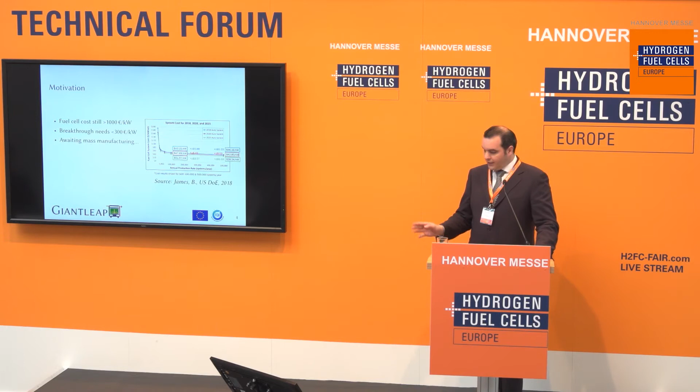That's the outline: a bit of introduction and motivation, then we'll go through the various results in the project. Here the motivation is mainly that we still have a very high cost for fuel cells today. It's in the range of 1,000 to 2,000 euros per kilowatt if you buy them today. But we expect a breakthrough if we go into the hundreds, for example, less than 300.

That's a graph from the Department of Energy in the US, and the most important takeaway is that the price will be reduced mostly by mass manufacturing rather than technological improvements in the next few years. So what we're waiting for is mass manufacturing.

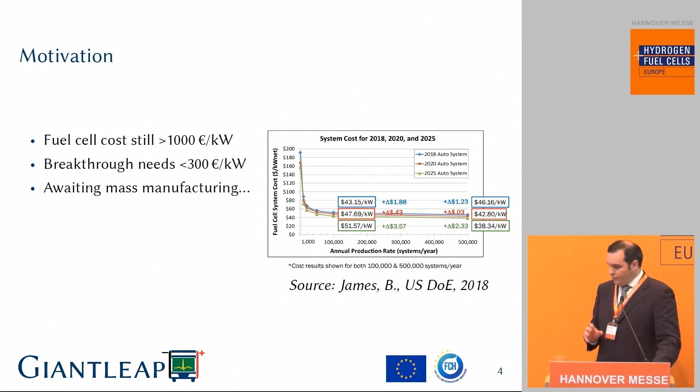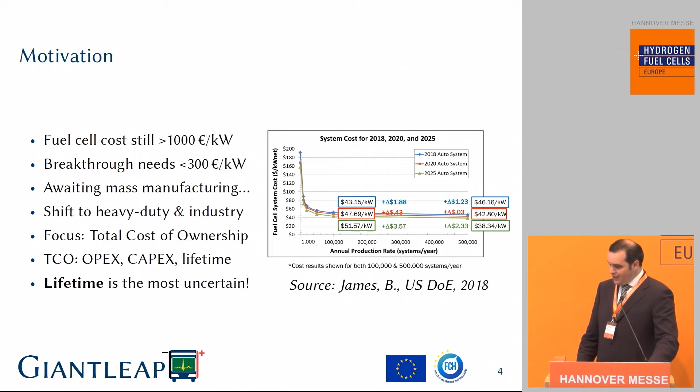And there is also, you might have noticed around here, a shift in interest from personal cars to heavy duty: buses, trucks, ships, you name it. The operators of these kinds of vehicles are more interested in TCO, in OPEX, CAPEX, and lifetime, rather than the car being cool, like a Tesla buyer could be. Of these, lifetime is definitely the most uncertain.

In the CHIC project, you might have heard of it, a very big EU project with over 80 million euros in budget, they measured a very low availability, around 70%. Now there is a cluster of other projects on buses in Aberdeen. They measured more than 85%, but it's still a far cry from the 98% that you need in buses, which is what you get from diesel.

You need reliability, and most of the time these buses did not have problems with the fuel cell stack itself. It was mostly the balance of plant and other problems, for example, supply chain. That's why we started this project Giantleap, to solve all these problems, to increase availability and to make hydrogen buses more acceptable to bus operators.

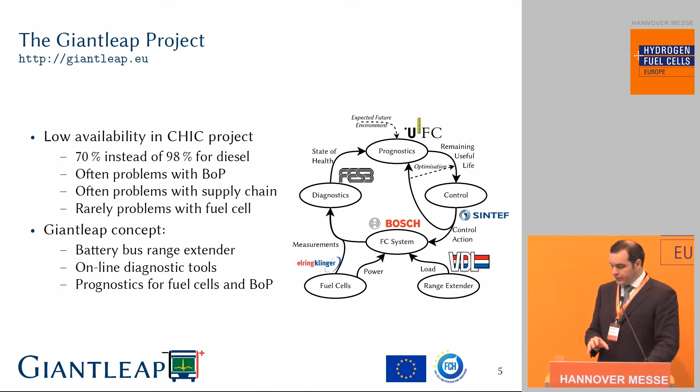So our concept is a battery bus with a hydrogen range extender. We'll employ online diagnostic tools and apply prognostics to determine how long the system is going to live.

Your buses are all battery buses, and when you need a long range or don't have the time for a charge, you just connect a hydrogen range extender like this one, and off you go. Then you can make a city bus into a regional bus. You can also use it to charge cars in theory, because it follows a very standard CCS protocol.

It has 2 stack modules for a total of 76 kilowatts nominal, and the balance of plant system was developed by Bosch. There were a number of bureaucratic implications about whether this is a battery or a hydrogen bus. I won't go into that, but it was quite interesting.

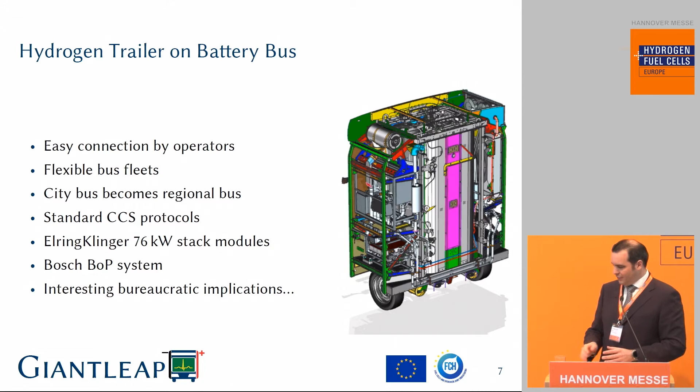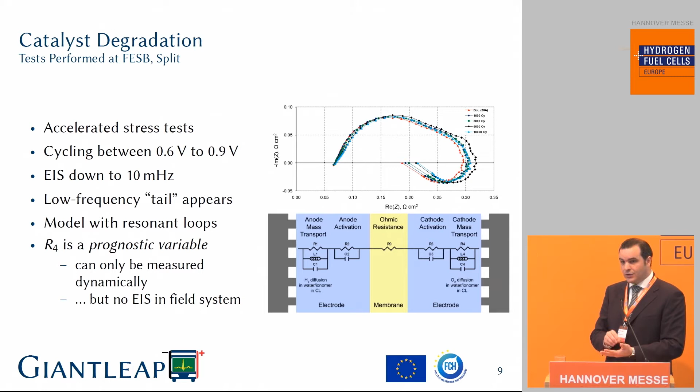But our project partners at the University of Split in Croatia found out that the resistance on the right, R4, is a very good prognostic variable. If you can find that one, you can tell how worn the fuel cell is. However, that resistance is in parallel with an inductance, so you cannot measure it at steady state. You need impedance spectroscopy or something else dynamic. And that's what we did.

We applied relay feedback. This is what we did at SINTEF. Relay feedback is a very old technique from the 50s for tuning PID controllers, and we modified it to work with fuel cells, and it actually worked wonders. We tested it at ElringKlinger in Dettingen, and it was able to measure this value of impedance that we're interested in

within a few seconds. I'm talking about 10 to 20 seconds convergence time, with equipment that cost in total 130 euros, which we actually bought at an electronics store in Stuttgart. So it is available, very commercial stuff.

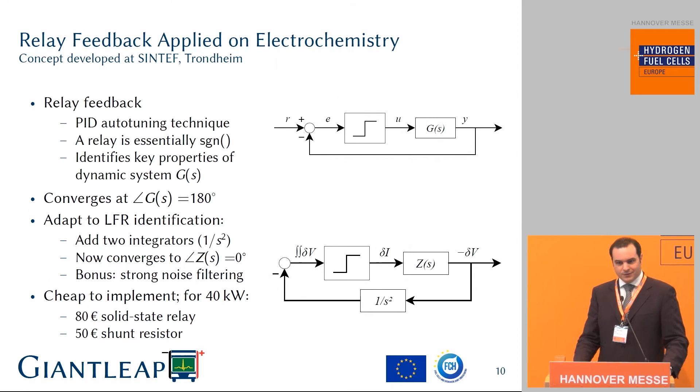Voltage rejuvenation is a phenomenon we first observed in a previous project we presented here in Hanover 3 years ago, Sapphire. Long story short, we noticed that when a system was shut down and restarted according to a specific procedure, the voltage actually kept creeping up instead of down as we expected. As you can see, the voltage from such a system is very erratic. It's very difficult to say anything about degradation rate until you have tested for about 1,000 hours.

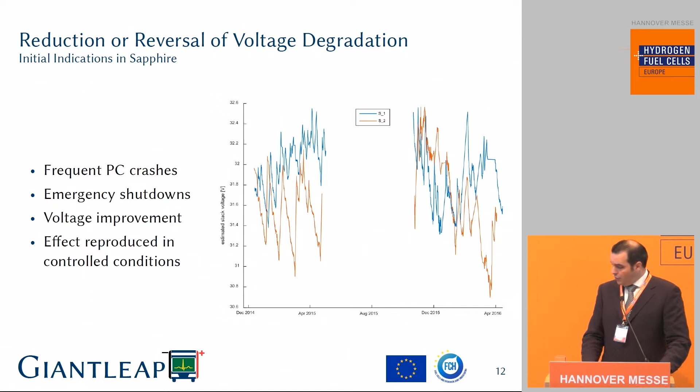But we managed to reproduce this effect in controlled conditions. So we know that it is possible to rejuvenate a fuel cell to a degree, and we are starting to understand this process. There is a report available on giantleap.eu. Our website is public and free for all.

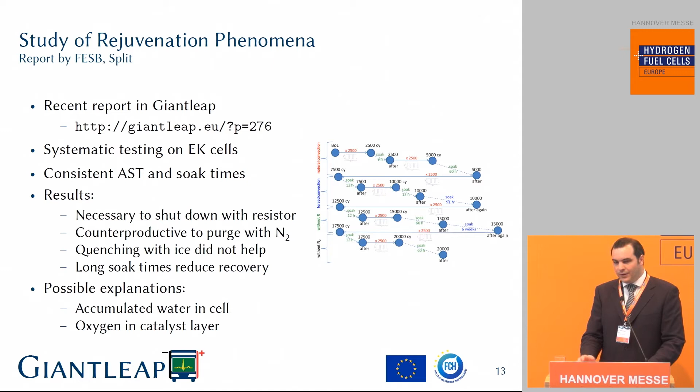We studied systematically on ElringKlinger cells how this phenomenon could work. We now have a number of pointers on how we can induce it. We have not yet quite understood exactly what the physical reality is. It could be accumulation of oxygen or accumulation of water in the cell or in the membrane. We have some ideas, but this is a very exciting topic of research we are still working on. But we know enough that we can implement this on the system.

Balance of plant, I mentioned before, it's really important because it's the main cause of failures in the systems, especially the compressors, supply chain as well. And in order to avoid a problem with supply chain, we tested here what is a Rotrex, very standard automotive compressor, with a fuel cell system. We want to use standard components so that we don't have problems with supply chain.

But this specific compressor, after being tested, failed after 200 hours. And of course, we cannot have that. That's not good enough. And so we have a public report on the experiments on this compressor and on humidifiers and other BOP components that is also available on our website for you to peruse.

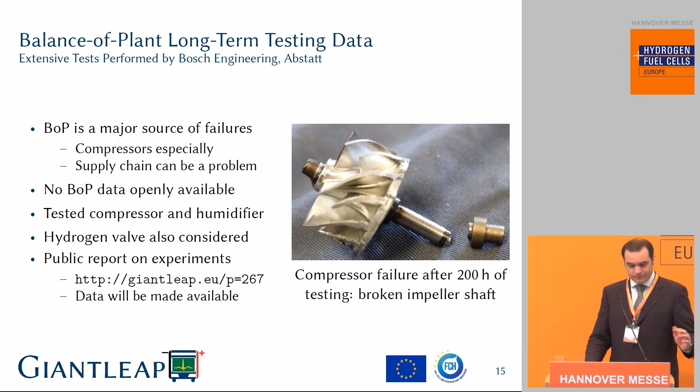So why did a compressor break after 200 hours? Well, it was connected to a stack cathode inlet, so it was pushing air into the stack, and it had a different characteristic compared to the normal internal combustion engines it was working with. And it turned out that while the nominal operating point was within the normal envelope, you can see there circled in red and blue, there are a number of areas that are beyond the surge line, and those are the transients.

So if you measure during normal operation, everything looks fine, but during transients you have this operation beyond the surge line that over a few hundred hours is going to wear the compressor. So in the case of Bosch, they found a very simple solution. They added a bypass valve, and now it works. Of course, the real solution will be to develop specific components for fuel cell systems. This is not especially efficient, but again, supply chain is more important at this point.

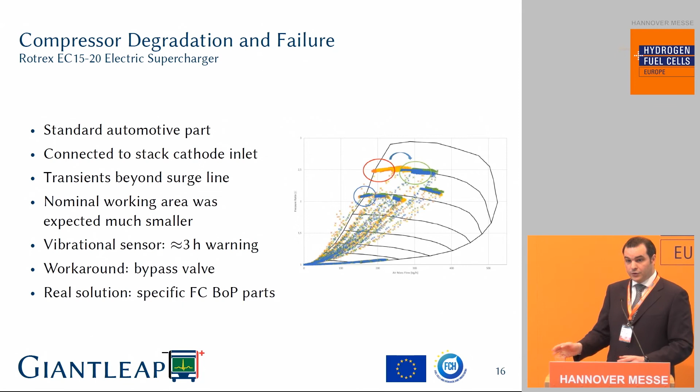Vibrational sensor, we tested that, but it only gives a very short warning, about 3 hours. So it's really important to make sure you do not operate in those conditions. Humidifier, it has quite fast degradation in the first 100 hours, but fortunately it settles down to a certain level. And given the data that has been obtained by Bosch, we can also use that number to dimension the humidifier so that we don't need to exchange it at a later point.

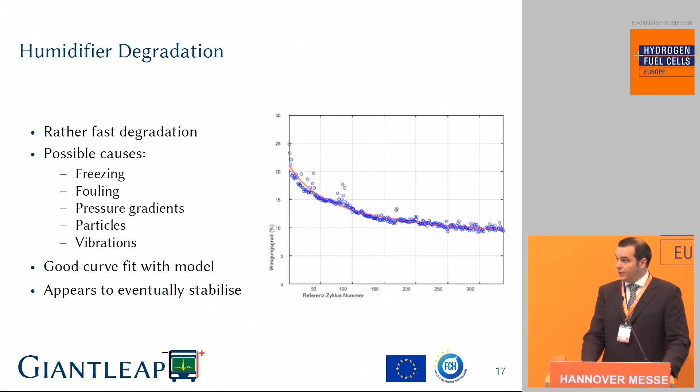Also, I'd like to stress, all this data will be made public on our website. They are not yet. We have to make sure there is nothing confidential in there, but it has been very difficult to find data for balance of plant components in fuel cell systems, and we want to fix that, and that will be free for all to use.

Prognostics, this is for fuel cells. It will be extended to fuel cell systems by the end of the project, which is in October. This is for a fuel cell stack, and we can tell that the ElringKlinger stack is able to meet the target of 12,000 hours we had for this project. In particular, this stack's lifetime is estimated at 15,200 hours, which is more than good enough. It's a car-derived stack, so it's not a specific bus stack.

One thing that we noticed is that fuel cell control units are not particularly computationally powerful. They must be reliable. That's the first thing, because you cannot afford to have a crash in a fuel cell control unit or in a vehicle control unit. Otherwise, that gives the word crash a more concrete meaning. So one thing that we can do is to have some diagnostics on board, but the heavy prognostics should be done offline. So we could upload the data to the cloud, maybe collate all the data from multiple buses or bus fleets and sell prognostics as a service to bus operators.

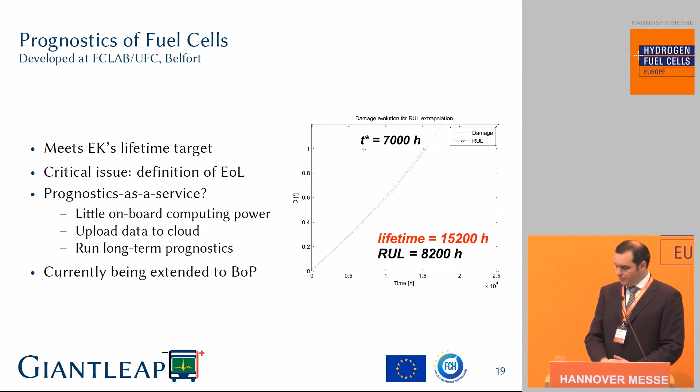So in conclusion, the key to industry acceptance of hydrogen buses is reliability, and that's the same for hydrogen trucks and hydrogen heavy-duty applications. We have a possibility to have very strong flexibility with hydrogen range extenders instead of pure hydrogen buses. We applied relay feedback and very old control techniques in order to produce novel diagnostic tools. We have proven that you can recover some of the degradation from fuel cells, but still we need more attention to balance of plant. That is absolutely critical.

And according to prognostics, for now we can tell that the fuel cells will last long enough, and the question now is to work on the balance of plant.

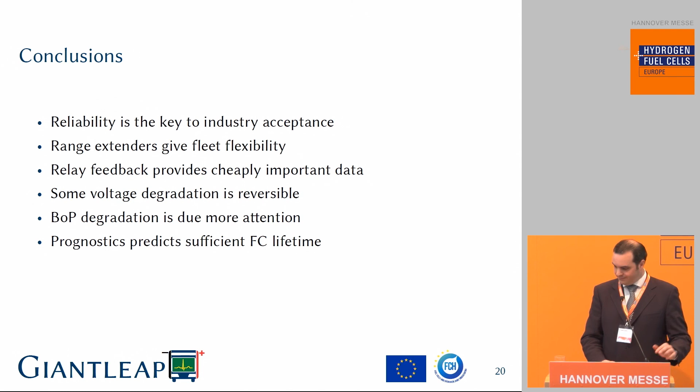Okay, so you said the project will be finished in October, September? It will be. And right now we are working on a demonstration. So that system is being built. Right now it's at Bosch. It's being equipped with the last bells and whistles. Then it will be sent to VDL in the Netherlands, where it will get its wheels, and then we will have it tested on road.

Okay. And so what's after the project is finished? You mentioned prognostics as a service, for example. Will this continue with one of your partners or within the Giantleap project? Yes, prognostics is developed by the University of Franche-Comté in France. So they are more interested in the science rather than the commercialization.